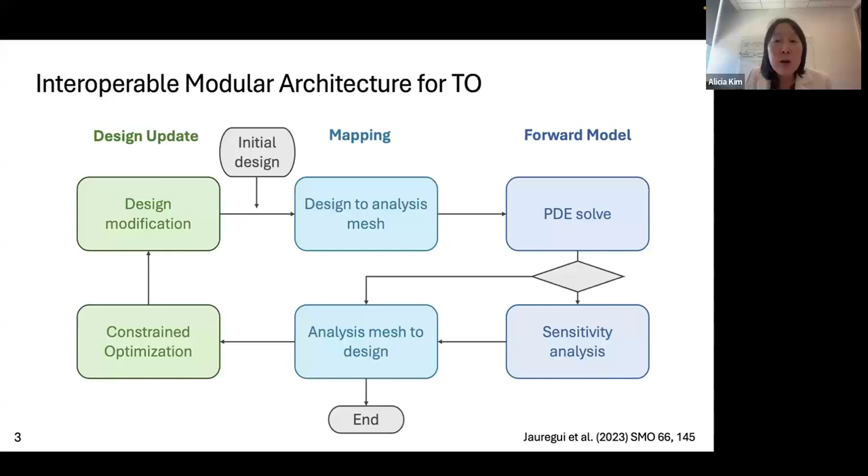One of the important things that this enables us to do is that we can then start using any PDE solver, including existing software, as long as there is a way that we can output the partial derivatives. So with this modular architecture that we have built, we've actually demonstrated this workflow using MATLAB, commercial software, and also in-house software. So from then on, we are able to build, for example, a more complex multiphysics workflow.

So here is a fluid structure interaction. You can see my light blue mapping is here. So here, we're using the level set grid; the green side is the level set design update. We have the standard regular grid that we use for the level set optimization. And our level set method, the most recent version, linearizes the optimization problem, and we solve a simplex optimization, which then determines the velocity to solve the level set advection equation. So all of those are the bit that updates the design.

And then we've got this blue mapping that maps the design grid, the level set grid, to the analysis grid. Now, the analysis grid that we have for fluid structure interaction is an Eulerian background mesh for the fluids. And then for structures, we actually use RKPM, reproducing kernel particle method. And we've done quite a bit of work using RKPM for solids calculations. Obviously, we don't have a mesh deformation problem. We move the particles directly where the boundary conditions are, so we can apply more accurate boundary conditions.

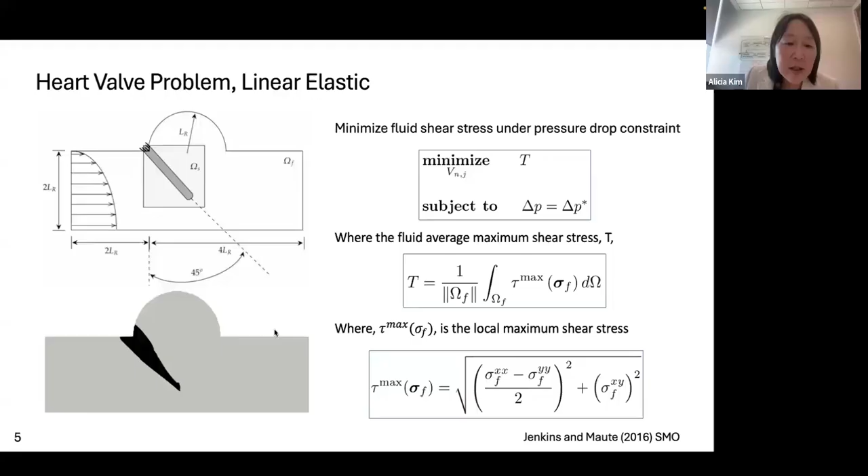What is notable about this particular benchmarking problem is that both the objective function and constraints are on fluid-based criteria, and what we are actually changing is just the mechanics. So it's a really good demonstration of coupled multiphysics problems. So they did this work, and these are the optimization results that they have, and they use linear elastic. So what we added is fluid structure interaction, but also geometric nonlinearity.

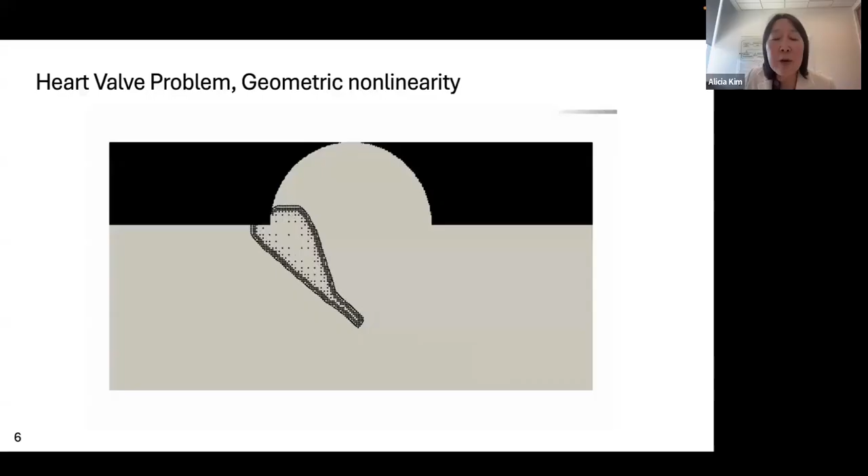So when I was talking about topology optimization under uncertainty, the fundamental problem there is to add the middle loop. Geometric uncertainty is a case where you have the middle loop. And here we're using the particle method. So you can see that there are many more particles along the interface where we're calculating the sensitivities that we map onto our level set. And further away from the level set interface, we have very few particles. So you can sort of see how the design changes as a result of this optimization.

And when we compared the nonlinear optimum versus linear optimum, on the left-hand side is the pressure distribution of designs optimized using linear elasticity. And then we did the nonlinear calculations to see how the linearly optimized design performs in this flow versus a nonlinearly designed one.

And the picture below is superimposing those two. So you can see clearly there is a different way that these two geometries actually behave as a valve, and there's 12% improvement in terms of actually considering nonlinearity directly. So we find that in some applications at least, we can get a very different design if we consider nonlinearity in structures.

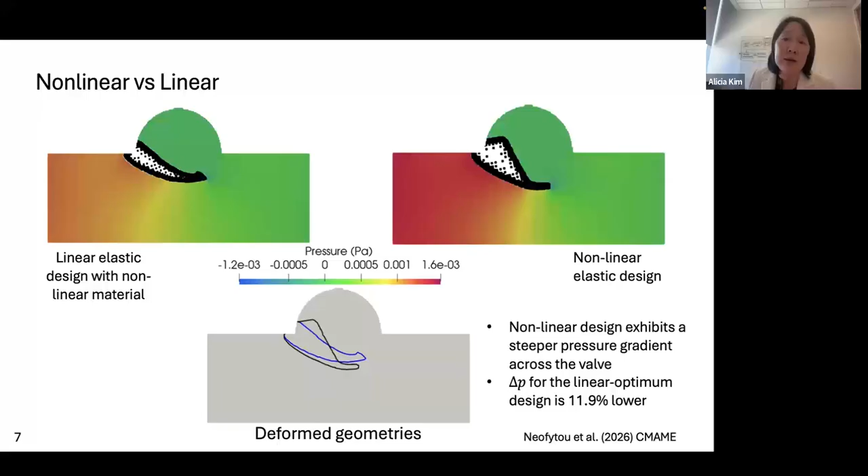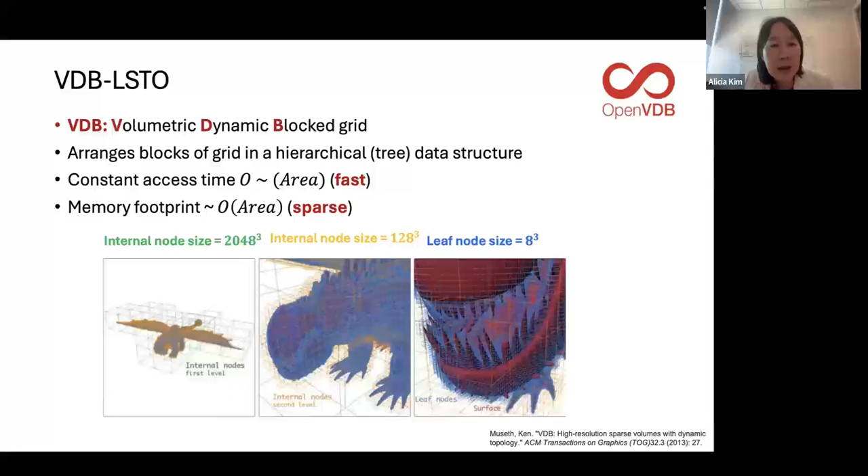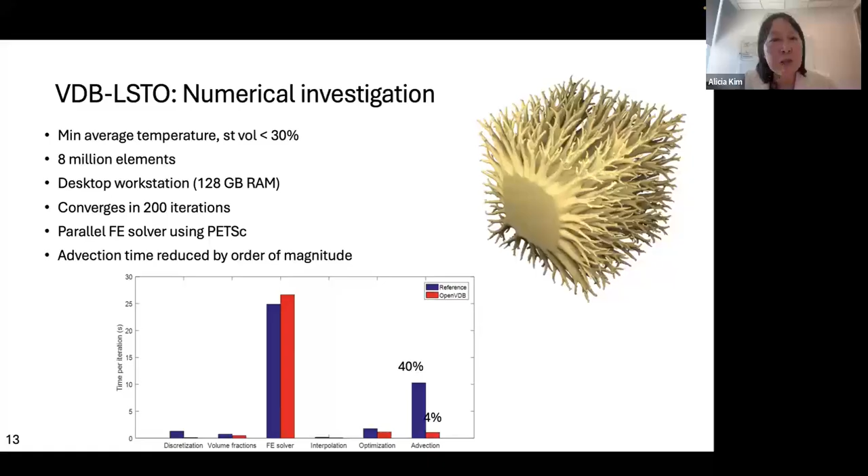Here we parallelized it using PETSc, so we still have this problem with the finite element being very slow, but in terms of all the other sections of it, I think we have a reasonably good compute efficiency. So now we are trying to apply this sparse grid idea to topology optimization and analysis of it. So this is one step that we have made.

So this is a fluid optimization. So now essentially we don't need to do a lot of calculation inside the structure, because what we're interested in is the shape in response to fluids. So what we have here is essentially we get rid of the mesh or the elements inside the solids. We replace them with just one row of solids and the boundary conditions, so that the flow sees the solids as boundary conditions.

So now, the typical way that topology optimization generally deals with this kind of problem is to actually mesh the entire thing with the fluid equations with what we call Brinkman penalization, which essentially works as a 0-1 density variable. And so it actually solves for the entire elements, whereas this way we can only solve for the fluids and we don't have to keep the solid elements. So we reduce the size of the problem.

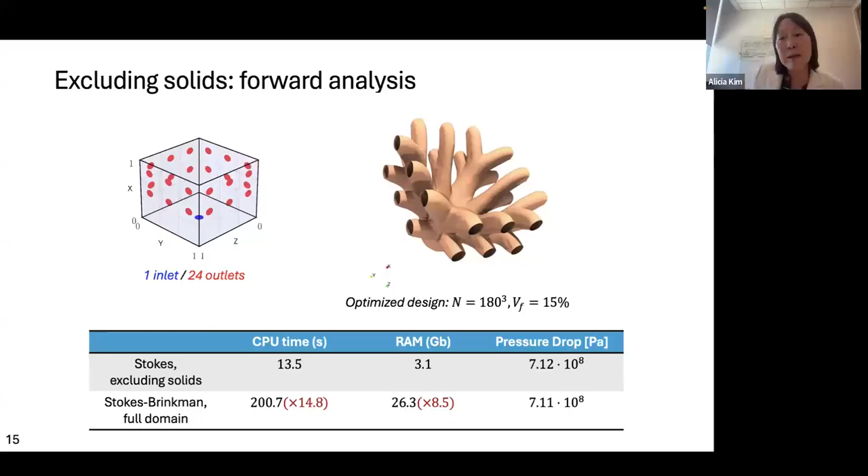So here are some examples where we're comparing the Stokes-Brinkman, which is the standard topology optimization, with our excluding-solid sparse grid type approach. And you can see that memory usage is an order of magnitude smaller, and as a result of it and a few other things that we've done, CPU time is also an order of magnitude lower. So there are actually a lot of compute efficiencies in terms of orders of magnitude that we can gain by carefully thinking about what we're modeling and what we're solving for.

It's 8 million elements. And again, we're running this on one processor. So we're not needing HPC, we're not needing all of this fancy computing. We can actually do quite a lot of computing on a workstation with a single processing unit.

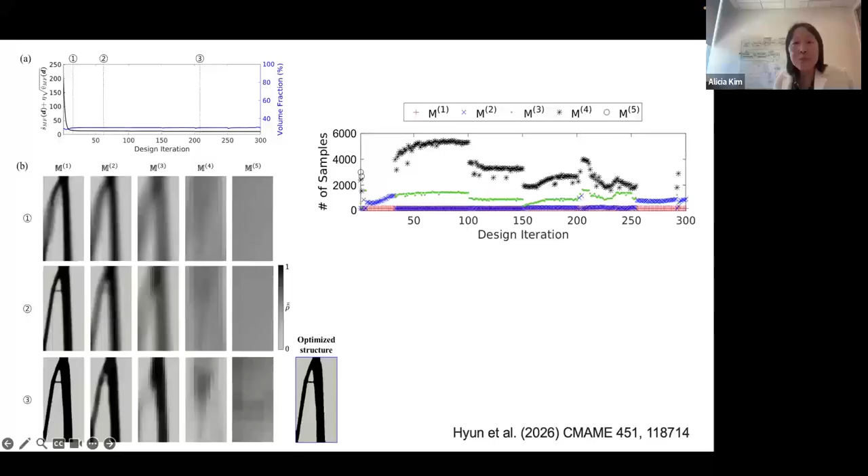And it actually uses mesh 3 and 4 mostly to do the Monte Carlo sampling. And at the beginning, when it's far from the optimum, even mesh 5, which looks like nothing really to us, actually gets used to do this sampling. So we get the same design as if we did the highest fidelity all the time. But obviously, we get at least an order of magnitude improvement in terms of the kinds of things that we can get. These are some of the research that I wanted to introduce in where we're going with large scale.

So just to summarize, I gave you multi-physics and multi-scale problems. I showed you a little bit about the sparse grid approach and how we can actually manage a large number of elements. And also we talked about topology optimization under uncertainties, taking a more generic Monte Carlo style approach and still being able to get optimization results from our topology optimization.

And I think this is really important to note that for a lot of topology optimization for single linear physics, a lot of experts already have that kind of expertise, and we don't necessarily need topology optimization. It's somewhat intuitive if you gain that expertise. So the argument that you can make as to where topology optimization could be useful is when you don't have a trained person in that area with expertise, and they can cleverly use topology optimization to get a design.

Now, the challenge with that is that they then need to know how to use topology optimization really well. And in our experience, without any expertise, it is still difficult to get topology optimization set up correctly to give you reasonable results. So it's not so reliable without expertise. But where topology optimization can become really useful is these large scale problems with levels of complexity that one engineer is not expected to have. So there's coupling complexities, coupling between scales, coupling between physics.

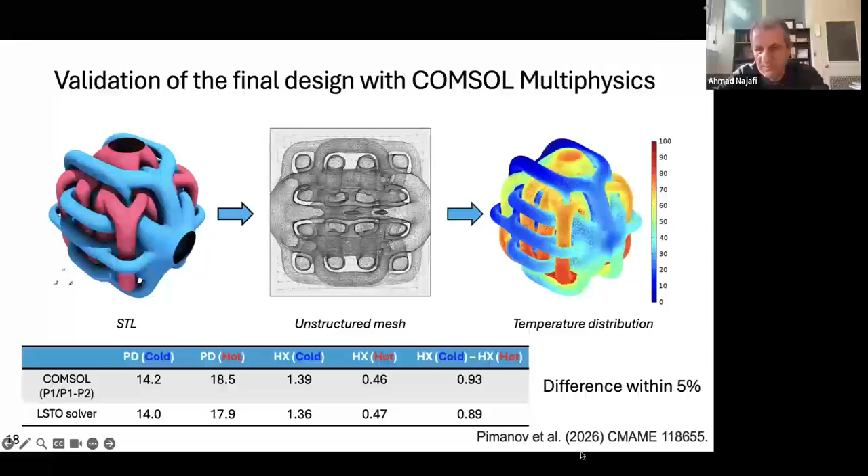I think we have a paper on this. Pimanov et al. This is a collaboration that we did with Boeing, and this is the paper. So I'm going to have to refer you to that paper for the specific numbers that we were getting.

Okay. And for calculating pressure drop, Alicia, do you do any reduced order model, or is it coming directly from Navier-Stokes? We actually did Stokes flow for this one. We're developing and extending it to Navier-Stokes now. But no, we just calculate it from Stokes flow.

Okay. Regarding this fluid optimization, I have two questions. One is, in the place where you are removing all of the solid, how are you deciding the boundary conditions? I saw that when you are removing, you are putting a boundary condition on a narrow interface. Is this a particular boundary condition, or are you just assuming it is a fixed boundary condition? So it's a no slip boundary condition. Sorry, I didn't say that. Right. So we applied no slip boundary conditions.

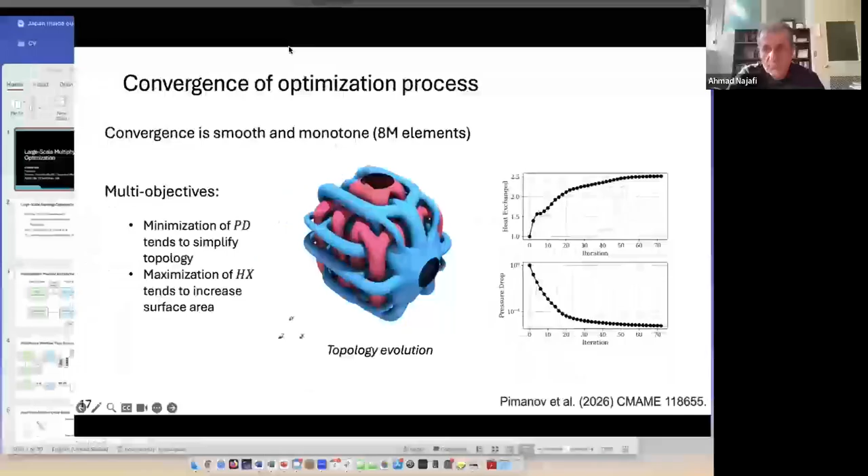Okay. And you said that you have a huge, I forgot the numbers, decrease in the amount of CPU and RAM. Was this because of removing the solid part that doesn't need calculation? Right. So essentially, in your matrix, we don't have all of these solid elements. So your system matrix is much smaller.

Okay. Any other question from the audience? One of the things that we also did was to develop a geometric multigrid solver. In that case, I think the solids are back in because the structure doesn't change, but we are showing an order of magnitude there as well. In that solver, we do it matrix free, so the scaling is linear and it behaves really well. So depending on the size of the problem you're solving and what you want to do, there are different approaches that we're investigating.

I have actually another question. If no one has any question, I can go ahead. Oh, there is a new question coming.

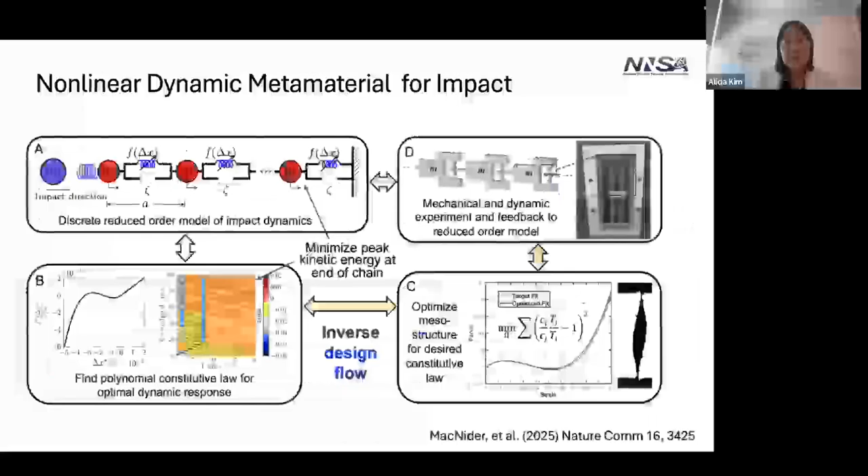In the nonlinear metamaterial case, what is the objective, the force intrusion curve? What are the design variables, and what about scalability of the method in terms of computational cost? So there are two optimizations. The first is happening at the discrete element, and here the optimization variable is the stiffness distribution. We use a third order function to model the stiffness function. So C2, C3, these are the coefficients. That's what we're optimizing for at the discrete level.

What we get as the output is this kind of nonlinear curve, like this blue curve, out of the first level optimization. Then we do topology optimization. So here is the topology that we get, with a level set parameterization. The way we formulate our problem is that the design variables are essentially the velocities of the advection equation that we solve for the level set method, which then changes the boundaries or interface. That's our standard level set topology optimization formulation, so that's our design variable.

And what are the other questions? Scalability of this problem. At the moment we've only looked at 2D design, mainly because experimentally 2D is just easier to do and it shows all the necessary ingredients. A lot of the studies going on in this area are looking at 2D results. And the scalability really depends, and this is really the subject of the PSAAP center that we have. In the studies we did with the Dreams project, the nonlinearity was essentially snap through, bistability, that kind of thing, and geometric nonlinearity.

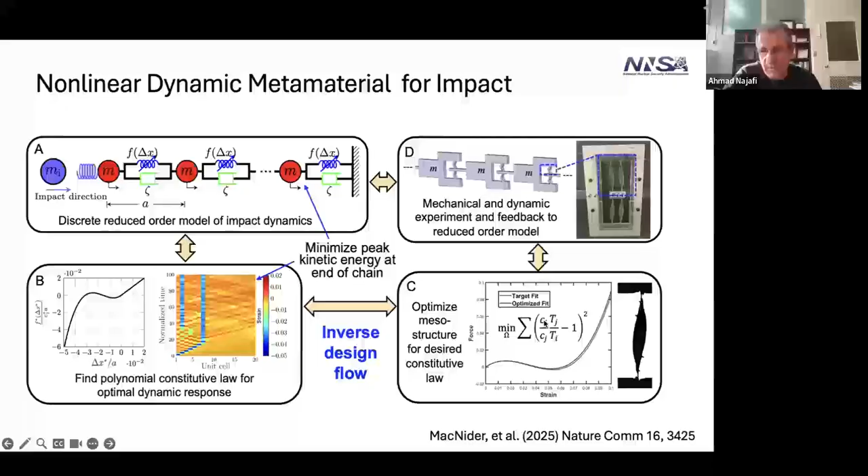In your chart you had M1 to M5 scales. How do you decide how many scale models you need in a real application? I believe it is about the multi-fidelity one. Yes, that's right. And basically, that's what the multi-fidelity Monte Carlo calculation is doing. Whether it's real or fake or whatever, we formulate the different finite element fidelities with different coarse level meshes, and that's automatically done.

And you can change the parameters to control the range of fidelities that you want to do. And then, when it goes to do the sensitivity calculation in this blue box, what it does is that using the correlation coefficients of that design and knowing what is the ground truth as the highest fidelity model, it will do initial optimization to work out how many samples you're going to get from which fidelity model to get the same level of accuracy, but do it much faster given the computational budget.

So it actually solves that problem, and then it goes in and does all the calculations. So it's already done for you. So deciding which fidelity actually has to be used in one of these optimization loops is automatic. Yes.

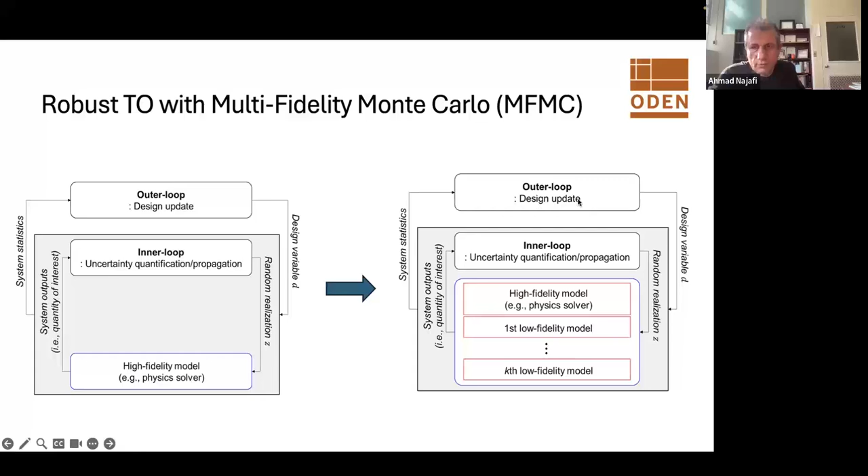Okay. So there is one question from Probin. He's asking, do you need remeshing the entire model when running the fluid topology optimization? No. Not to say anything about what is good or not, but I personally just don't have the complex 3D meshing expertise. And I've seen how other people do things, and it's been difficult, and it takes a really long time when you have a 3D mesh that you are remeshing for fluids all the time,

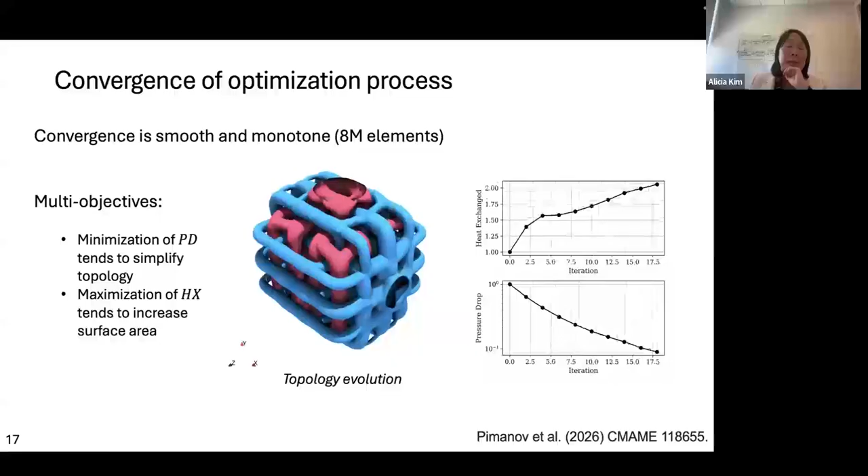and same goes for structures. So we go with approaches where things are regular. So here you just got a uniform mesh, and again, here we just got a background mesh that's Eulerian. If somebody that knows a lot about remeshing wants to come in, then we can just change this method out and create a mapping function that links between the analysis unstructured mesh to this, if that's easy to do, so that could be possible.

I mean, there is the question of, is that possible? Is it worth doing this mapping when you have unstructured mesh? How long does that take? I think there's a lot of questions that arise from it. It's just that personally, I don't have that level of expertise in remeshing or mesh generation. So we're sticking with regular mesh.

Okay, just one question. Since you are using level set at the end, are you for your analysis using the projection on the regular finite element, or XFEM, or the cut finite element? You could do anything, really. The level set grid is just used for level set propagation, for design. It's not used for the PDE solve. So here we're using particle methods. You could use XFEM. You can use whatever you want.

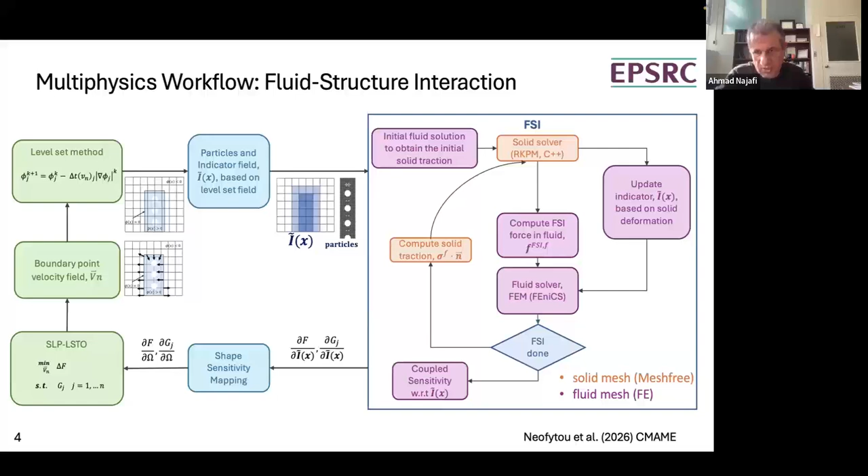Sachi asking, am I correct that here you have used mesh refinement as fidelity and only one single response you are predicting? In usual cases, the fidelity reflects the model's fidelity to replicate geometry, loads, boundary condition physics, and the discretization. Often this means the different models have different levels of accuracy in prediction, different responses. What challenges do you see in extending the multi-fidelity framework here to such problems, because you have different accuracy?

Sure. So this multi-fidelity Monte Carlo technique has actually been used for a whole variety of problems, including some of the fidelities being experimental results or some data-driven method. So we don't think the generality of this MFMC is limited. But essentially, to do topology optimization, we need the field values. That's the sensitivities that we need.

So basically, whatever fidelity model you want to introduce, can we calculate the sensitivities? If that's possible, then we believe it should be usable, and we're not expecting from the MFMC perspective that there would be any challenges, since they've already done a lot of applications with lots of different things. I think what we're doing is applying a reasonably generalized method in the context of topology optimization, so we can solve topology optimization for general uncertainties.